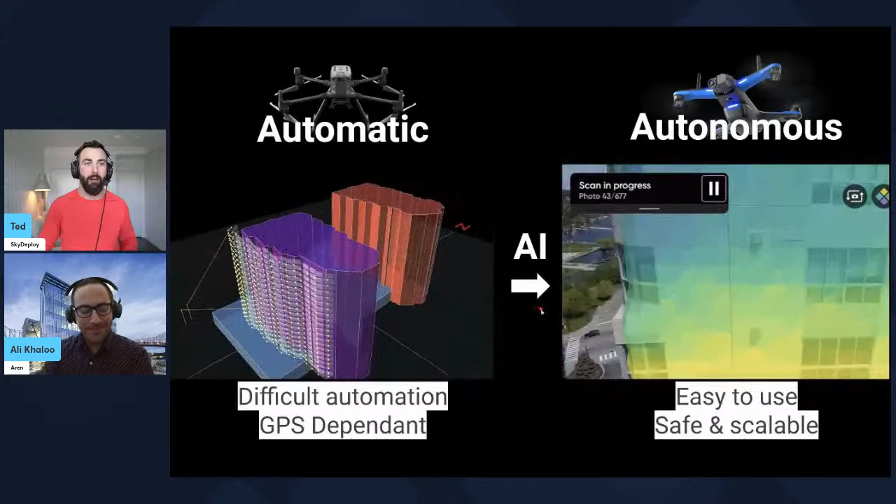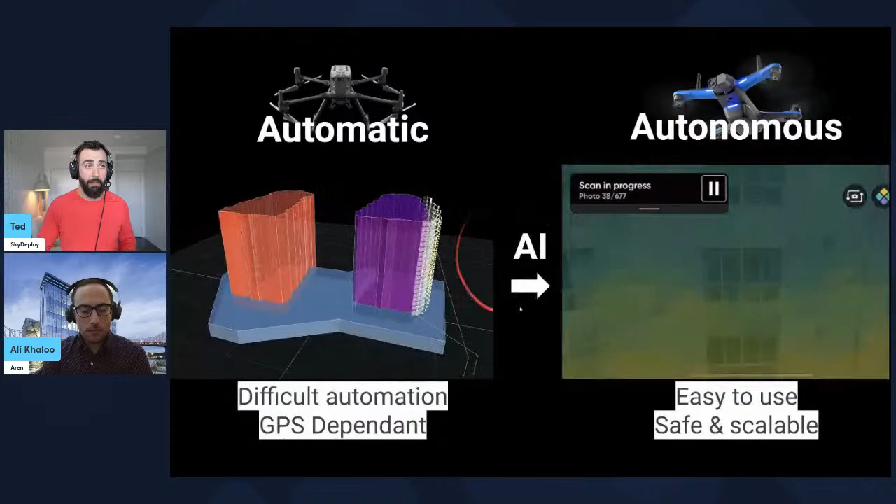This is my favorite component of the data collection part: the AI in the flying of the aircraft. Specifically, the example here is the Skydio S2 Plus with 3D Scan that I used for this facade inspection, and I planned it with an automatic drone in mind first. Then I tried 3D Scan when I got there, and it just worked, it was so easy, I could hand it to any one of my employees and they're off and running.

And finally, data analysis — that's what we're going to be talking about in depth today. Data analysis has been around forever, we're always analyzing some sort of data, but in the civil engineering world it gets pretty complex, and even with drones, that complexity remains.

So Ali, you shared with me the slides on the left. Can you walk me through what we're looking at?

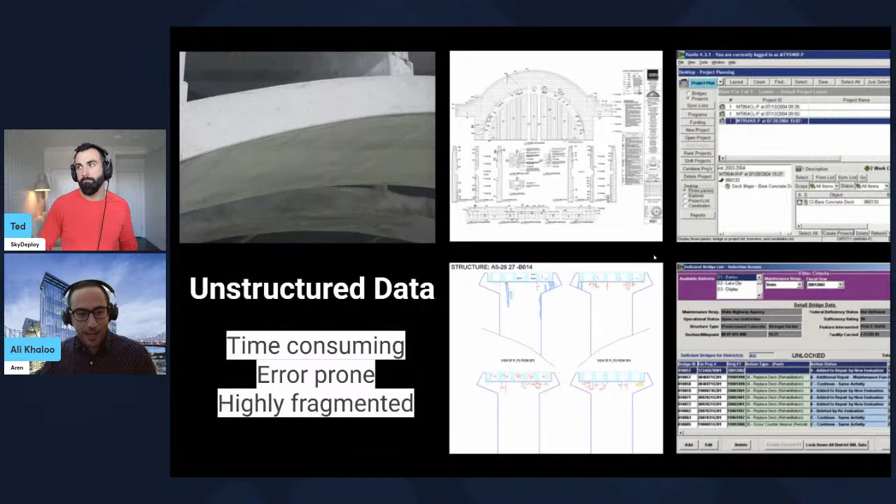Absolutely. So before jumping all in on AI and analyzing visual data, let's take a step back and understand what is the status quo. And as I mentioned before, I've done it myself, so I have first-hand experience on this. When you're looking at the way you're creating data from our assets and the whole condition assessment inspection, which later on you're going to use for decision making, that whole pipeline is very much precarious and outdated. When you look at the details, it really didn't change much since the 70s.

So what happens right now is you have very skilled engineers that you have to send out there, and they have to literally climb and walk miles and miles of infrastructure, let's say bridges, with nothing better than their naked eyes, looking for millimetric damages, such as cracks. Sometimes it's literally naked eyes. Sometimes it's hammer sounding they have to do to find hollow areas. Sometimes they have to use binoculars to look for different things.

And after doing all of that, which by its nature is going to be inconsistent and subjective, you have a newbie going out or a very experienced inspector, and you're going to get different results. That's known within the industry. After doing that, now you're coming back to your office and you have to put together a report.

So in the middle, what you're seeing are actual reports from a building facade on the top, and on the bottom from a bridge. In these cases, now you have to go through your field notes, go through the images, which like the ones you're seeing here, by nature are decontextualized. So you don't know exactly from where you took those images unless you're making clear notes.

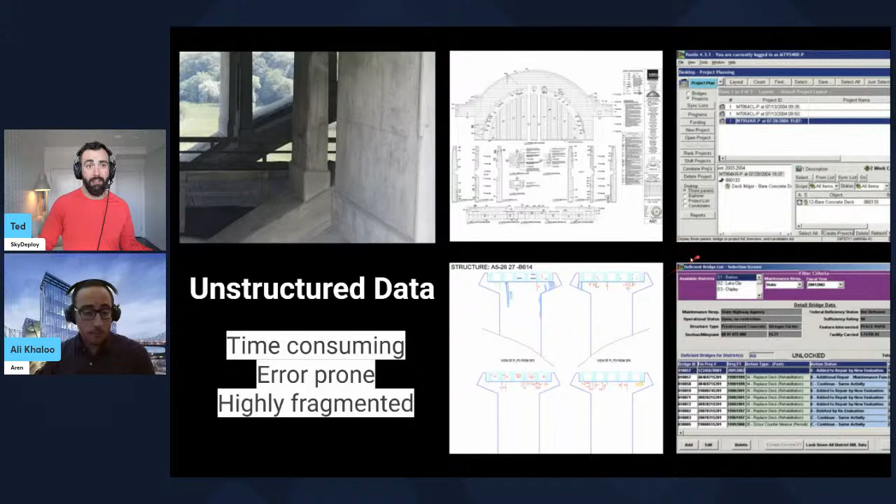Absolutely. So you're in the thick of it. You were the one doing some of this work, making these spreadsheets and these drawings. And I guess that's where the inception, the idea for AREN came from, right? And that's the problem you wanted to solve. So that's what AREN is about.

It's about ingesting various types of data and then using AI, computer vision, a whole mixture of technologies to really streamline that final process and make better decisions because everything is in one place, but it's also been boiled down to what matters, and efficient.

Absolutely, you have to keep in mind that we are capturing a lot of data from these assets and different sources. Sometimes it's something as simple as photos from a point and shoot camera or your cell phone. Maybe you get more sophisticated and add a drone to the data collection. Maybe you have lidar, maybe a 360-degree camera, maybe infrared.

So what we do at our company, and what our product does, is take that data from our clients, run its magic, and as an output you get a highly detailed visualization of the asset and its health through time, as well as preventive maintenance plans and capital allocation plans.

But when we're talking about the 3D models and the way that we are doing this change-in-time analysis, it's based on the information you're seeing on the right hand side. So basically we are creating 3D models, and all the analysis happens in 3D. We are detecting all the damages, quantifying those damages, providing the severity analysis of them, and all of that is based on the codes that we have in each country.

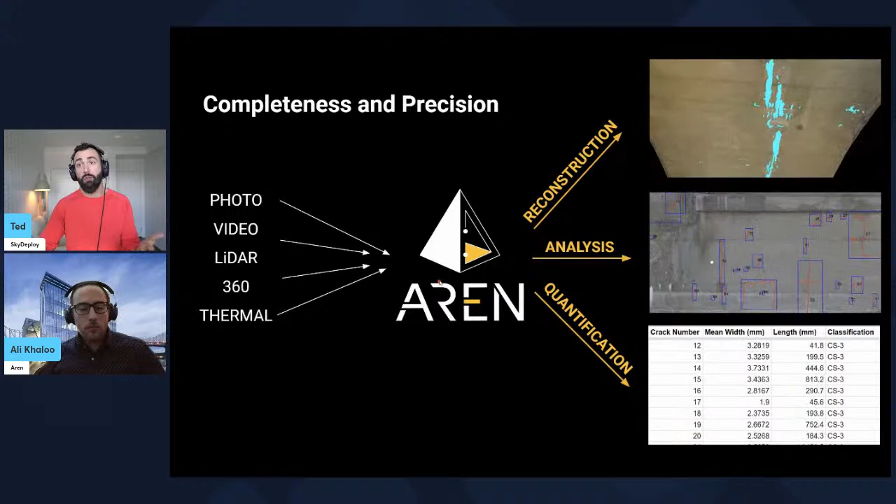But when those things come together, and as they are getting easier and more scalable to put together, you get the 3D reconstruction, the 3D model from photogrammetry built into your product. You don't have to do that elsewhere and bring it in. You get the analysis through the AI, so that speeds up an insane amount of time in terms of going through and looking for it.

That's 90% of the work, and then an engineer can validate it afterwards. And then you also get, my favorite part, the quantifiable data on a damage-by-damage, element-by-element level, and that's something that before I saw AREN, I hadn't seen done completely in an automated fashion. That got me really excited.

So we had a lot of questions with some posts I put up. We decided to do this webinar to get people into understanding what is required for this to work well, and then how it works, because AI has to be explainable for it to be really adoptable.

So, short answer, absolutely yes. You have to keep in mind that the whole goal of asset management—let's say you're an owner and you're going to have that asset for the next 50 or 100 years, these assets usually outlive us—what happens here is you want to minimize the life cycle cost, and at the same time improve the serviceability of that asset. So those are the top two things that you want to do.

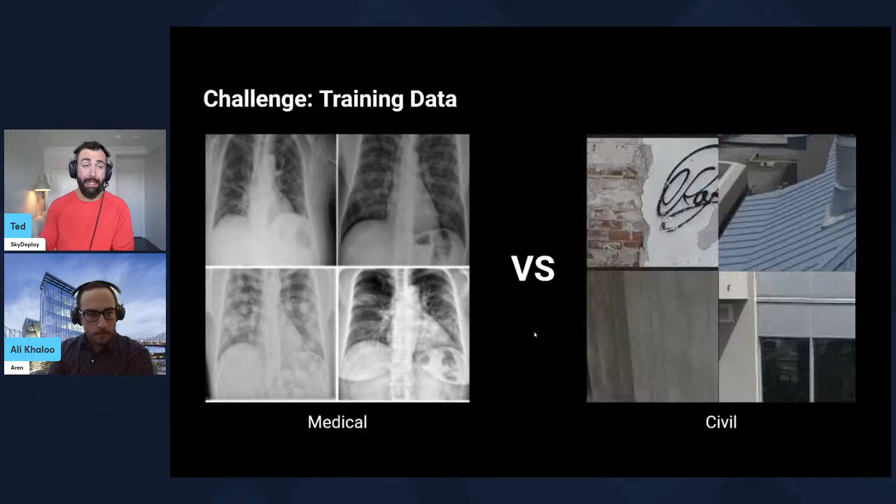Yeah, no, it's a big problem. And like you said, the data isn't collected with the intention of making it into 3D geospatial formats after, right? So no photogrammetry intended with the data collection, even if the data set exists. Yeah, so that's a big problem.

Now, once let's say you have a data set and you've trained it, what kind of scene understanding is there, and what do you need to apply in the case of engineering and civil assets? That's a very important thing. It's not just, hey, let's apply AI to this very particular problem. So let's start with how the computer sees things and identifies things, and how that evolved over time.

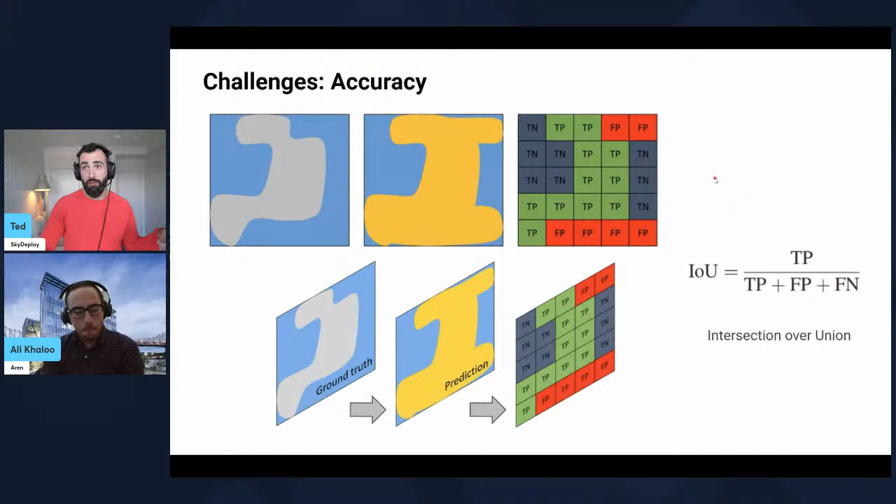And it's a real reputation burner if you get it wrong, right? You've got to be ready for game time when going out and doing this type of inspection, since the engineers are looking at it. There's no chance for mistakes, you really have to prepare and have great accuracy out of your models.

So another factor of difficulty, the way I understand this slide is the crack in this image takes up such a small percentage of the pixels, it's such a minute detail. To us humans it's obvious, but to a computer that only sees numbers and pixels, that can really throw it off as well. Is that what we're looking at here?

Absolutely, you're talking about challenges on why this is a tough cookie, a tough task to take. Basically what happens here is the computer is going to learn from the different features it's going to see in your data. So when you have the target region, let's say in this case cracks, that yellow, as a good example.

So when you have the pixels associated with the crack, defined as cracks, when that ratio is 1/1000 - one pixel for the crack and 1000 for everything else - when you have that, we call it an imbalanced data set. Your mathematical model, your deep learning neural network, whatever you want to call it, should account for that, because you're not seeing so many of the crack pixels, you're seeing actually a lot of background.

So what's going to happen if you don't account for that? Going back to the previous slide on accuracy, if you don't account for this kind of imbalanced nature of your data set, what you're going to have, as seen on the lower half of the slides, is false positives and false negatives. Especially the false positives, there's going to be a lot of that.

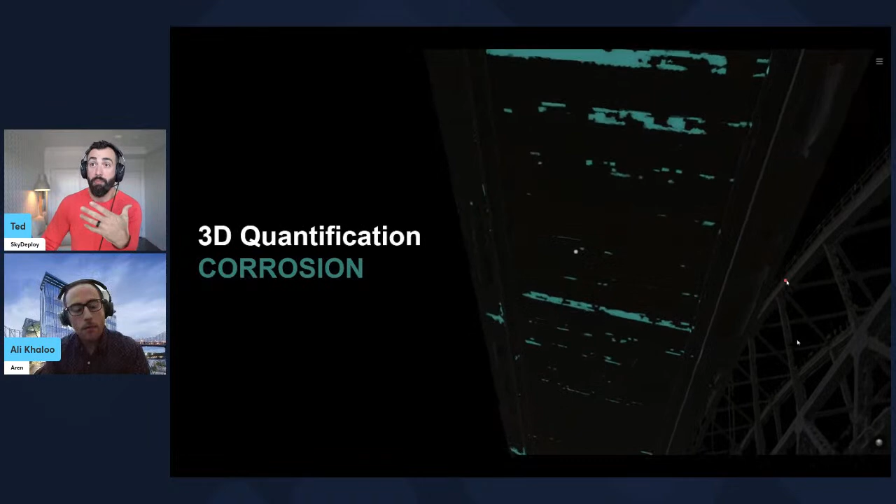Here's an example that I collected with the Skydio 2. It's by far the best drone to collect bridge data from, in my opinion. And I never collected it with this use case in mind. I was just there doing a video inspection, which is typically how we've done bridge inspections. We had some extra time because we were done so fast, so we collected this data so I could test out some photogrammetry, because I love photogrammetry.

But one of the things that you detected right off the bat, it's concrete, so you checked for efflorescence, cracks, and spalls. And I was really impressed. Anyone that sees this immediately understands what they're looking at, and they immediately understand where they're looking at, right? There's no ambiguity there. It's contextualized.

So that allows engineers and experts to really identify issues from a very high level, but also very specific as well, element to element. Something may not be so important if it's isolated, but if there are other things around it going wrong, then that's a big red flag, and that's again why you need the expert to look just at it.

To emphasize why it's important that you have these labeled 3D models - all those damages, they're in different formats. You have the RGB model, and you have the hotspots for that efflorescence here, or the one before, which was everything dark, where only the corrosion was available in 3D to see. So there's two things which is very important.

Number one is, I've had many conversations with engineers who have seen drones, they've seen 3D models, but basically the impression was: it's cool, it's nice, it's a nice 3D representation of my asset. Yes, of course I can do some virtual inspection type of work on it, I can make some dimensions. That's all good, that's all benefit. But again, if I have to look at the 3D model, and now I have to spend hours and hours on my computer to render the model and look for different damages and then annotate them manually, it's sort of like you're almost back to the same place of subjectiveness, inconsistency, and on top of that, having this tedious task to do.

That's why we are doing all the modeling in house. And then, through our platform, we can very easily render these models on different devices with different compute powers.

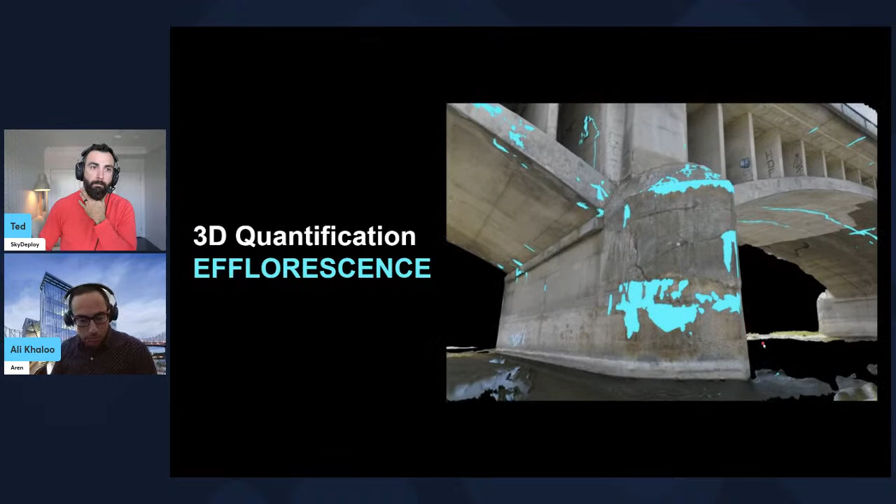That brings us to the second point I wanted to make: quantification. By having everything in 3D, now you can quantify and understand the size of different damages, the depth of the spallings, and all that kind of stuff.

And as you mentioned, we do all of that per material. So right now, in terms of offering to our clients, we are working with clients on concrete assets, on steel, asphalt, masonry, stone, limestone, for example, and terracotta.

It's important to mention why we did it this way, why material based, because now we have this huge catalog of AI models for concrete, and we can apply that to a bridge like the one we're seeing on the screen, or the same model to cooling towers, industrial chimneys, dams, levees, you name it. Same thing with steel, same thing with asphalt. So it helps us get to different verticals without customizing the technology or tweaking different pieces of it.

So we had a question: is the solution already marketed in France or Europe? I haven't seen it yet. Well, it doesn't matter where you are, because as long as you're giving it good data, then it works. So it's completely agnostic of the input source and how you collected that, as long as you did a good job.

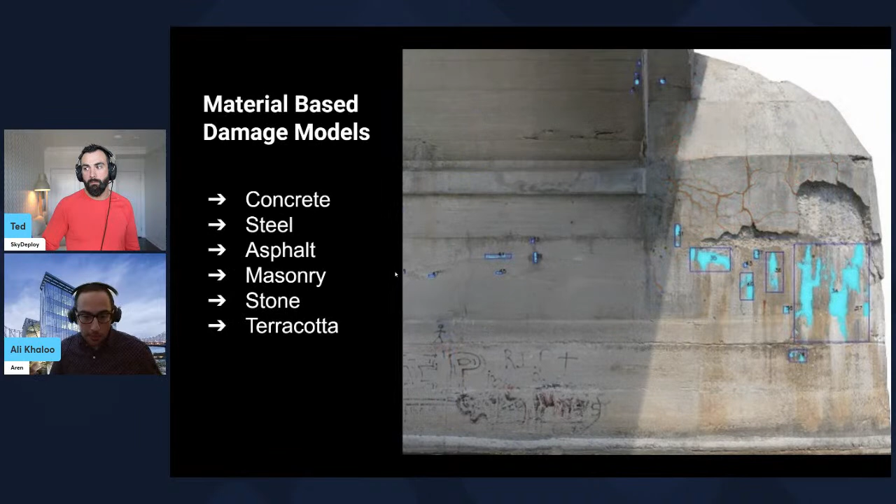At the end of the day, we're a SaaS product. So right now, the way we talk about ourselves is: if you have data coming from Paris or coming from San Francisco, it doesn't matter to us, as long as it's good data. Regarding whether we're working in Europe, yes, we're working in the US, in Canada, in Europe, in different countries, all the way to Japan. So we are available to get different jobs in different parts of the world.

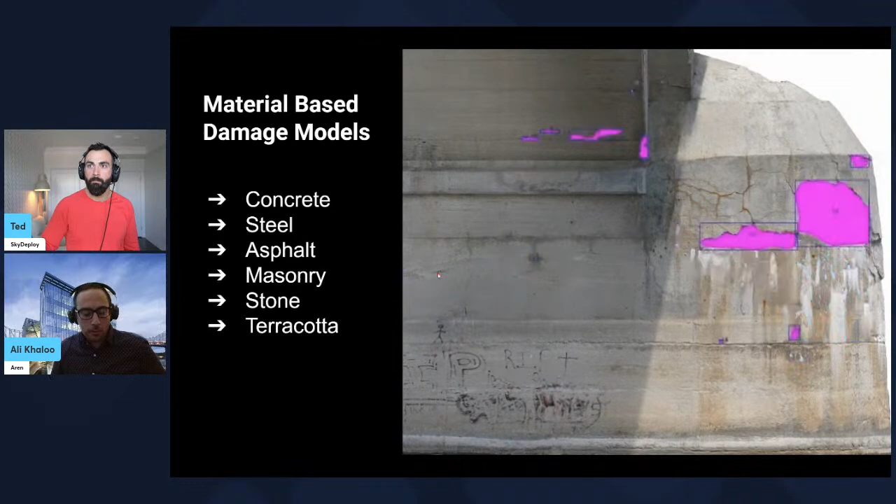And you're seeing all kinds of data. So one type of data I recently had a chance to run through AREN—I'll take you guys through a little case study of how we did the data collection, because in my opinion that's where it all starts. At the end of this, I'll also share a link that Ali provided, and you guys can open the data set yourself and explore it in 3D.

This just shows you don't need a device or a fancy computer to open this. This is a 2 kilometer runway, very high resolution. You can open it on your phone with a QR code, so check out this airport. We have an intersecting runway, and we're doing an asphalt condition assessment.

The interesting thing was that drones at airports are complicated. Everybody knows that, but it's doable. We were really out there to discover: how complicated is it? Is it scalable? And what are the things people should look out for?

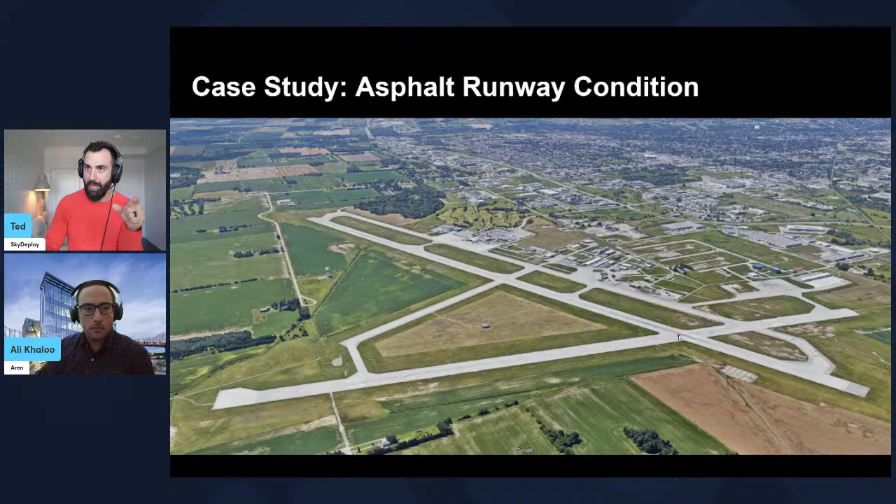This was done through an academic institution, and we had a small window of opportunity where they were repaving the intersection. This runway was completely repaved at that point, but they left the intersection for last. So the airport was open—there were aircraft, jets, 737s going in and out throughout the day. It was a towered, international airport with flights to all over North America, and we had to keep all of that in mind.

We couldn't shut down the airport for this, because there wouldn't be any point—we could just do it the traditional way, literally driving down the runway and looking out the windshield, what's called a windshield survey. That type of survey is completely unquantified, just random samples. The engineer, or in most cases the airport operations people, are just giving themselves a qualitative look at the site and sampling different sections.

So our thesis was: let's see how quickly we can do this. Speed is super important, and we can't shut down the airport—of course, we are going to be able to shut down that surface.

That runway is not going to be taking takeoffs and landings, but you have to do that anyway if you're driving on it with a car, or if you're walking on it. Any human on that airport surface means it has to be NOTAM'd and closed, at almost any international or larger airport with a tower.

A few interesting things we encountered: at an intersecting runway, we had planes landing and taking off right above us, so we had to change altitude in some areas. At the intersecting area we had to fly lower to the ground, and we kept the same altitude in other sections. We had a tower, which was helpful, but they have a lot to think about.

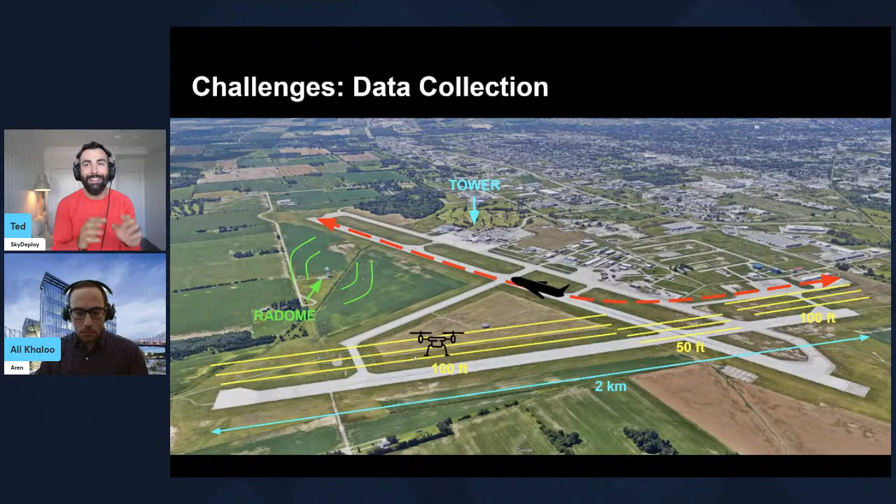Additionally, we found some interesting interference from the radome. This is a very powerful radar, this big white sphere, and it's emitting a lot of energy. You can't even be too close to it for long periods of time. When we were flying, we noticed the signal strength between the drone and us was degraded quite a bit. So for people thinking about exploring this, keep in mind all of these things that we learned, and hopefully you're prepared for them too.

We had a bit of a balancing act to do. We needed high resolution, high accuracy data, but we had a large area and little time to do it. We estimated the data collection needed to be wrapped up within about 2 hours, end to end, because we didn't want conditions to change. Weather is highly variable, and then also the traffic—we didn't want to disturb any airport traffic or cause any more problems, because they're never going to let us do this again.

High resolution means low GSD. We were using a 45 megapixel camera, a P1 on an M300. That's very accessible, a workhorse in the industry. It's not super expensive, it's affordable, and most people that do operations already have it. 45 megapixels is not that many.

We had to fly low to support this mission, which means low GSD, low ground sampling distance. We were able to achieve a ground sampling distance of about 0.3 millimeters. It turns out that the tower, after we did this flight, actually preferred us to fly low. When we were flying at 100 feet, that was low for us, but they said, could you go lower next time?

We could, and the reason was that at 100 feet, they could see us, and this drone was moving back and forth, and it was kind of confusing. It was something they didn't want to have in their sight and think about because they're so busy. So that was the first thing we learned—low is good, so that's promising.

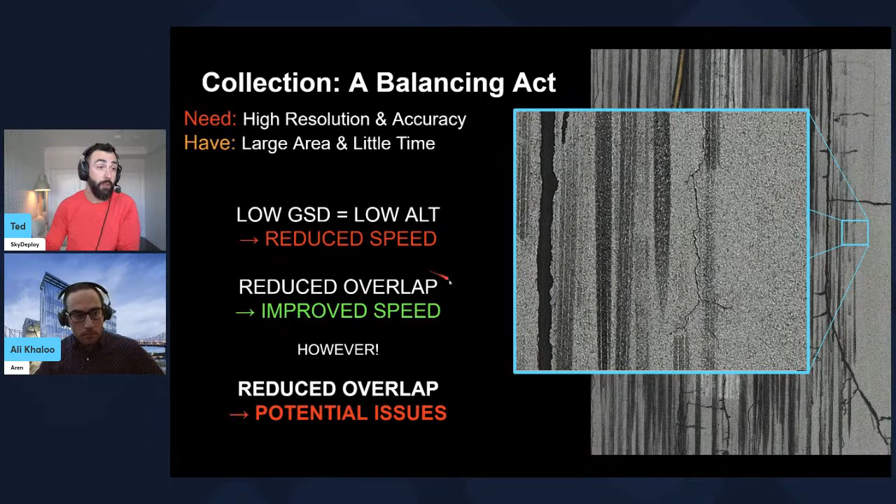But when we went back and processed it—and this was actually before I had even met you—I tried processing this on a few different photogrammetry engines, which everybody knows I love to do, and I had some interesting problems. I had GCPs, 36 of them, and we set them up as you're supposed to set them up when you're doing corridor mapping.

We had PPK, so we fixed the metadata in the image with PPK tags. The position of the drone when it was taking that picture was very accurate. And all of this together in any other situation would have meant it's going to be a perfect, highly accurate map the first time you try it. Well, this is what I got the first time I tried it.

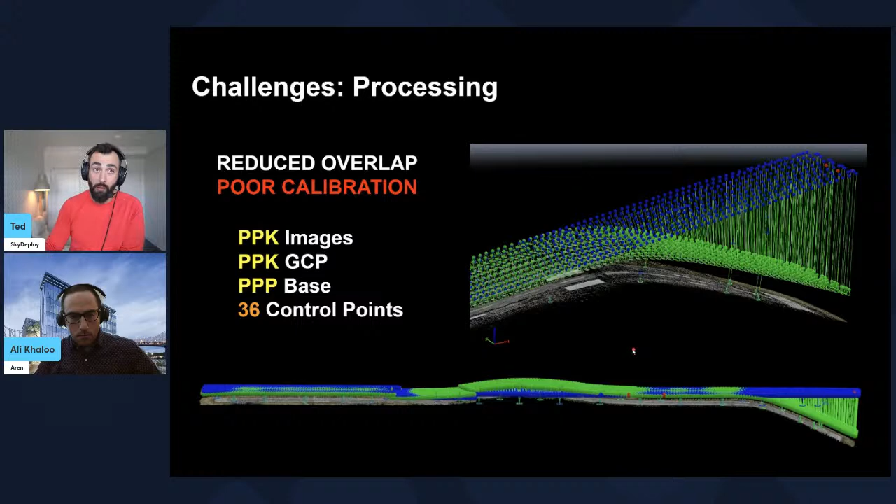People familiar with photogrammetry will recognize this is Pix4D Mapper, one of my absolute favorite applications. I love it, but it didn't do so well with this. I discovered after a lot of tinkering that this was related to the camera calibration. Because we had overlap less than typical and were flying close to the ground, and the runway had a lot of features, but the features were very similar since it's asphalt here, asphalt there, the internal camera calibration did not optimize those values as it should.

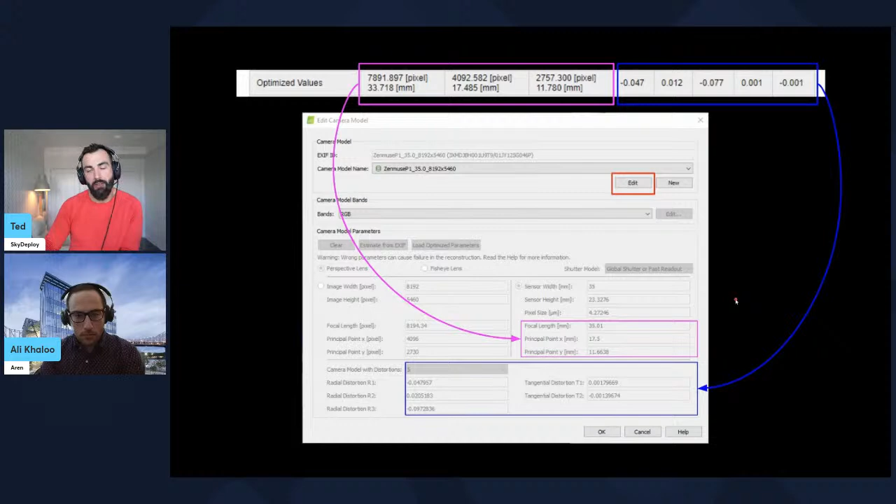So I eventually fixed this problem. I got to the bottom of it. I made a post on LinkedIn about it as well, and I'll probably do a little bit more. But it was time consuming, so processing took a long time, about 24 hours, and I'm doing it on a fairly beefy computer.

And I got my resolution. I was able to figure out exactly what that resolution is because of those ground controls. And overall, the model was within 1.5 centimeters in RMSE error. So the accuracy, even across the z-axis, the up and down, was within that 1.5 range.

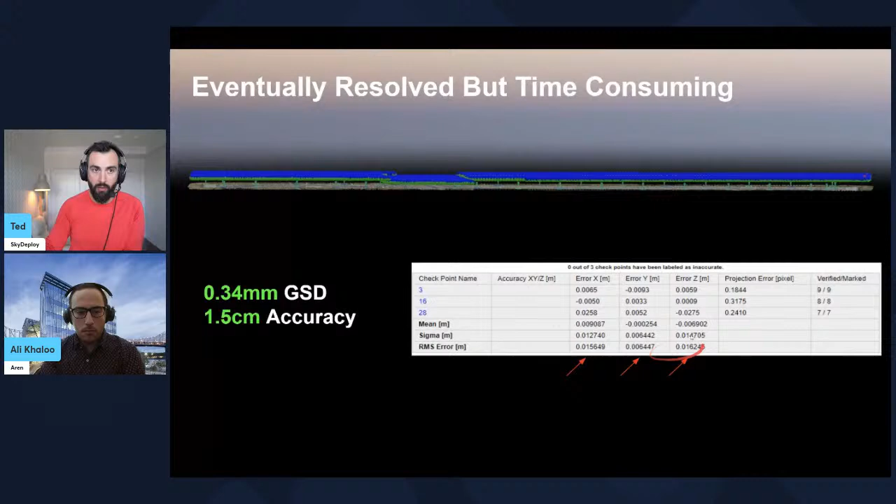That brings up the question: I did GCPs, I did PPK. Did it matter? I ran this test two times, once with just PPK images and once with GCPs and PPK tagged images. And I found that when I processed it through AREN, the difference in length between control point A and control point B that were farthest apart horizontally was just 0.019%, which was 0.35 meters, or 35 centimeters, across almost 2 kilometers of distance.

That blew me away. Doing control points in this kind of situation basically doubles or triples your time. We had to get out there at like 5 a.m. and start collecting these images. And it turns out you don't need to do that. So this is very efficient, very practical, and I think airports should be doing this.

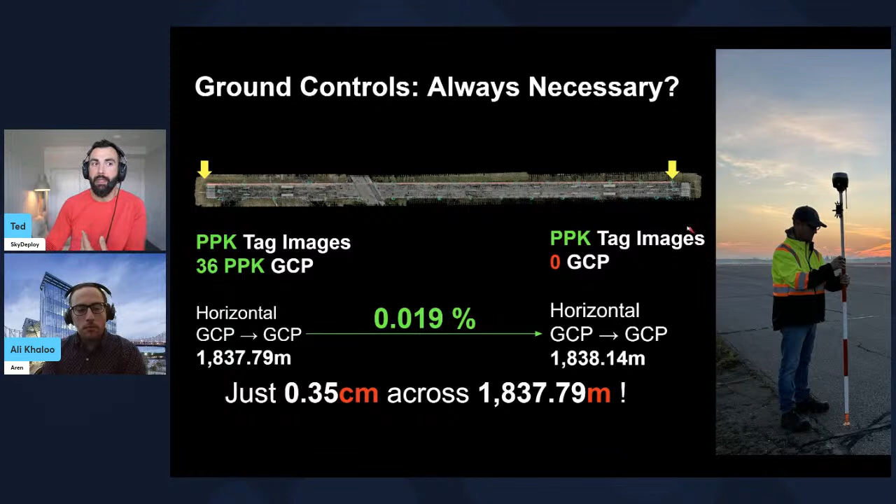The amount of data that we collected was incredible. Shout out to the other photogrammetry engines that also had no issues, but they didn't have anything for the analysis. So I mean, I can't go and label 2 kilometers worth of cracks.

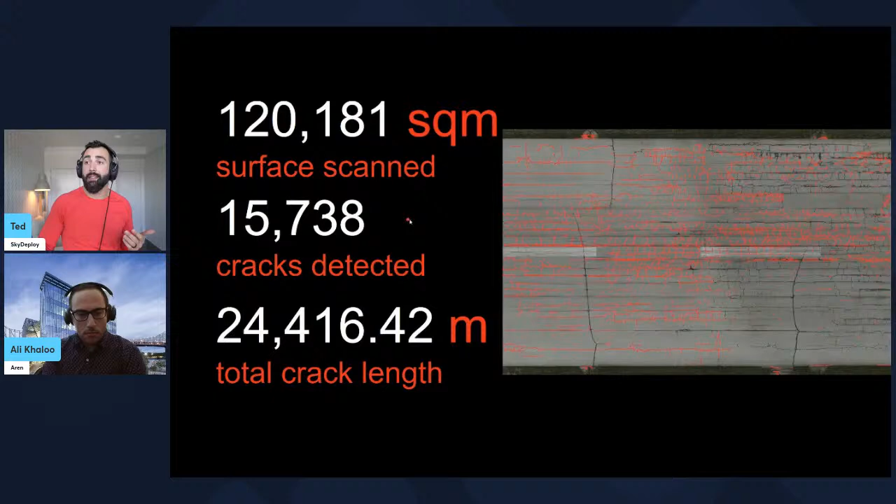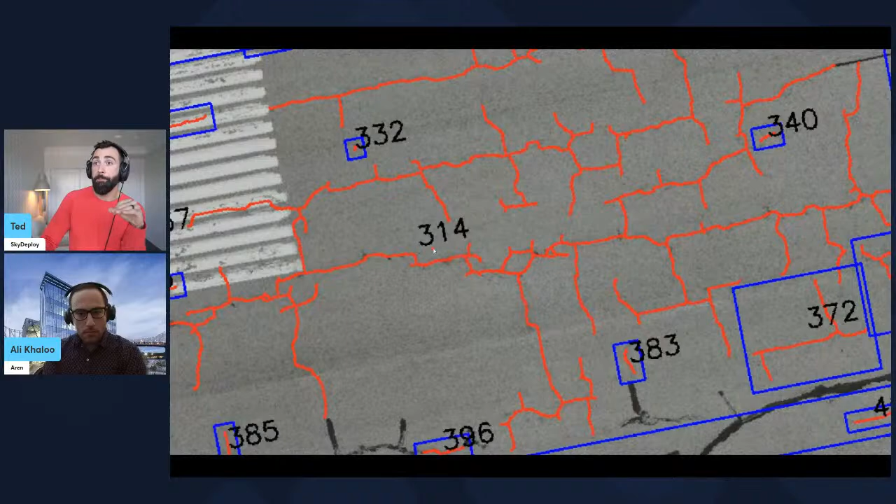And when we ran it through AREN, we had almost 16,000 cracks detected. If you stretch those cracks end to end, every little branch, every little corner, it adds up to about 24 kilometers of cracks. And if you look at it, very, very few false positives—I was barely able to find even one across the entire data set—and very few false negatives given the data that I was able to provide it.

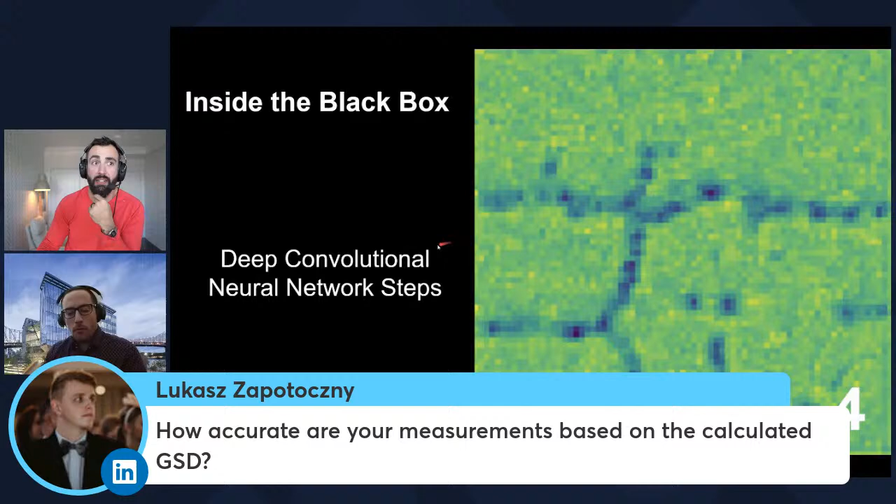So now you have this very clean, semantically labeled image. Lukasz here asks, how accurate are your measurements based on the calculated GSD? So that is what kind of sets your smallest unit of measurement, is your GSD. We collected at 3 millimeters, so I know that each pixel on that image, even after it's been processed by the AI, represents 3 millimeters on the ground. So it really depends, is my answer.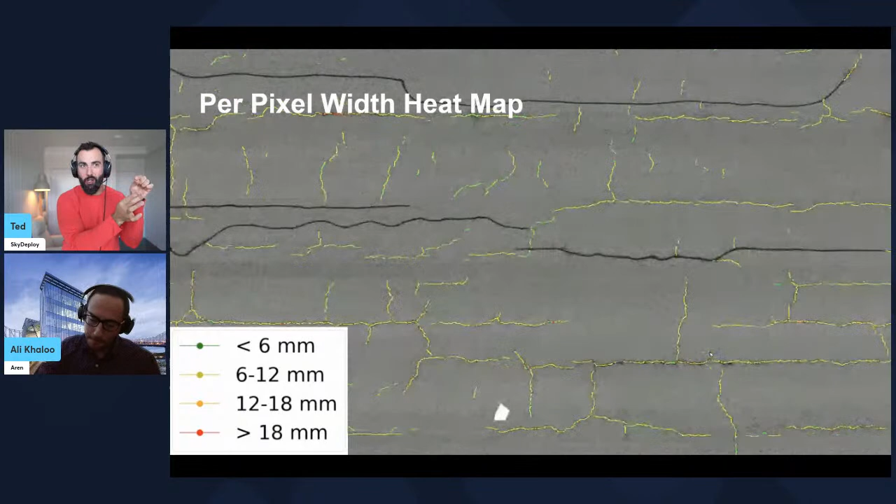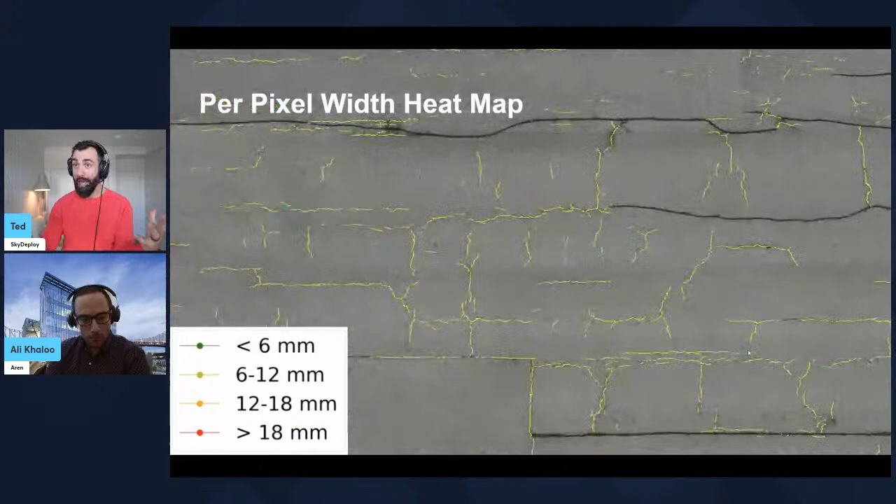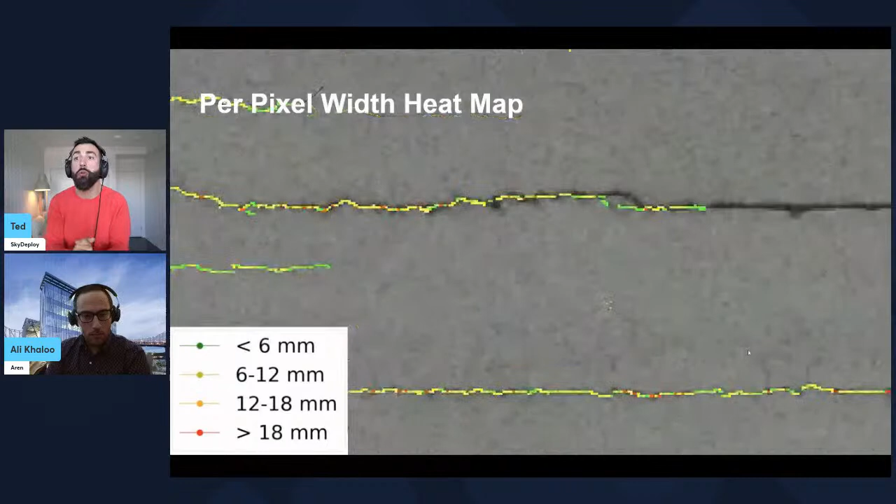For 15.5 kilometers worth of cracks - no, that's never going to happen, right? So if anything, this is orders of magnitude more data than we're used to, but it's data that matters because, as any engineer will tell you, it's the crack width that they care about, not so much the crack length. And seeing the relationship between the crack length, the crack pattern - longitudinal, transverse, alligator cracking - what's happening in terms of how they're arranged gives you a lot of insight about what the potential issue would be underneath the ground. So then you can maybe go and ground truth it, do a GPR, a ground penetrating radar. You have a starting point because you have all of the contextual information and quantity information together.

So this is available for the audience to check out. AREN uses the Nira viewer, which everyone knows I'm also a huge fan of. But the big X factor there is that all you need to open it is a device that can play video, and you'll be able to open a 3D model. So on your screen is a QR code. If you pull out your camera app and look at it with the camera, you don't even have to take a picture - you can open up the link and take a look at the model itself. So dive into that, and if anybody has any questions, I'll go through some of the comments that were made, and then Ali, you can answer them.

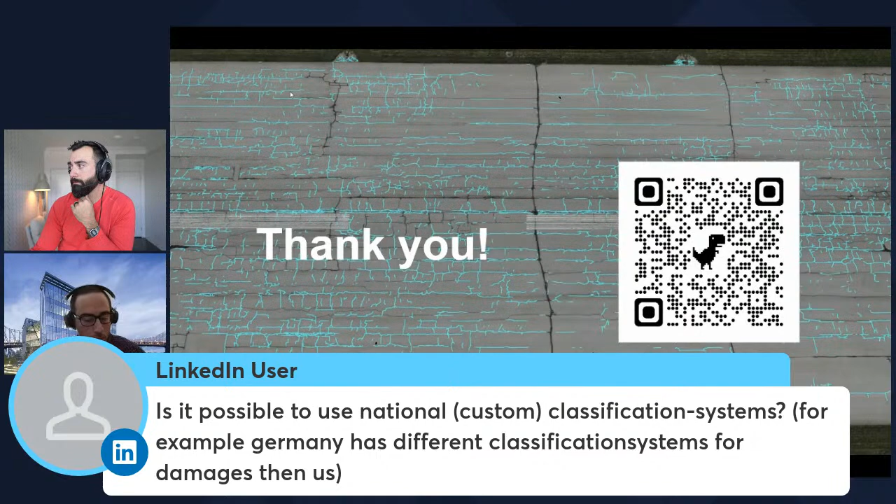Because we're working in different countries, we're very much used to this, so we can easily adapt to whatever standard you have in that particular country, or even for that particular asset. Sometimes the asset owner wants even more granular information than what the standards of the country require. It's just pixels on a screen, right?

And that leads to the next question: can we rely on ortho photos? I'm pretty sure some of the files that you delivered to me included ortho photos in that. So an ortho photo is a 3D model basically flattened from a perspective, so you can do both, right? Is there anything I'm missing there? No, you can do both.

In fact, when you're looking at the deliverables, we provide both of them. In the case of a flat surface like this one, it's going to be just one orthomosaic covering the 2 kilometers. In terms of the bridges, it's going to be each face of the elements providing that orthomosaic, and we're reporting based on that. The reason we do that is it's easy copy-paste into whatever PDF format the engineers have to report to the owner, so we're just providing all of that information to them.

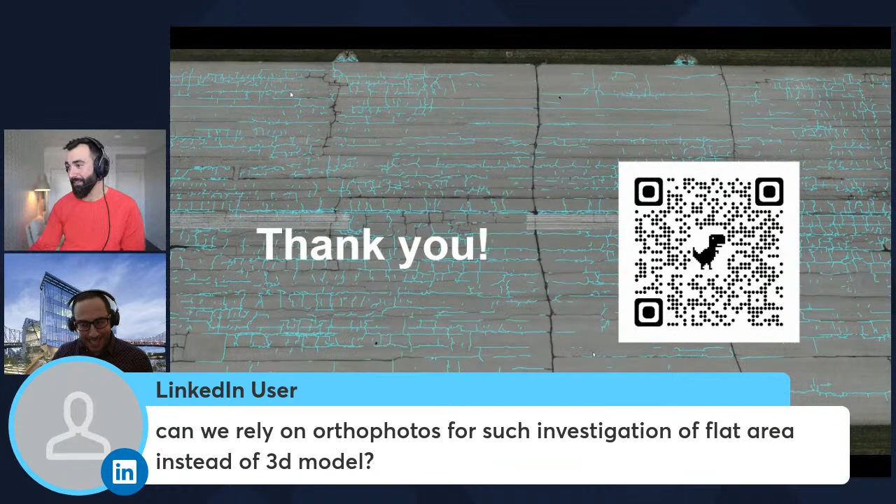Yeah, and PDF is still king, right? I always tell people in the 3D world that we're competing with 3D data versus PDFs at the end of the day. Little by little it will change.

Next question: is it possible to detect crack depth? I can answer that right off the bat - I tried doing this. If the crack is wide enough and the width of the crack is wider than the pixels, and in some cases maybe even just slightly, you can. It's GIS data, right? You pull it into something like QGIS, use the profile tool and draw a line across it, and you'll see the profile. I was actually able to match visual cracks in the ortho to a significant dip in the Z height in the profile view.

So it really just depends on your data. If crack depth is super important to you, then make sure you get data with the resolution that allows you to do that. Am I wrong there? Have you seen this from your clients? We're giving the same exact answer - if that's what you're going for, you have to pick the right camera at the right distance with the right focal length to get to a GSD number that provides that depth for you. That's the only way to do it.

And with all of this, you have to remember - it's intuitive, but if you're looking at a 0.05 millimeter crack, I'm talking about within this particular case, you cannot expect to achieve that with a GoPro camera standing like 100 meters away. So you have to do better than that.

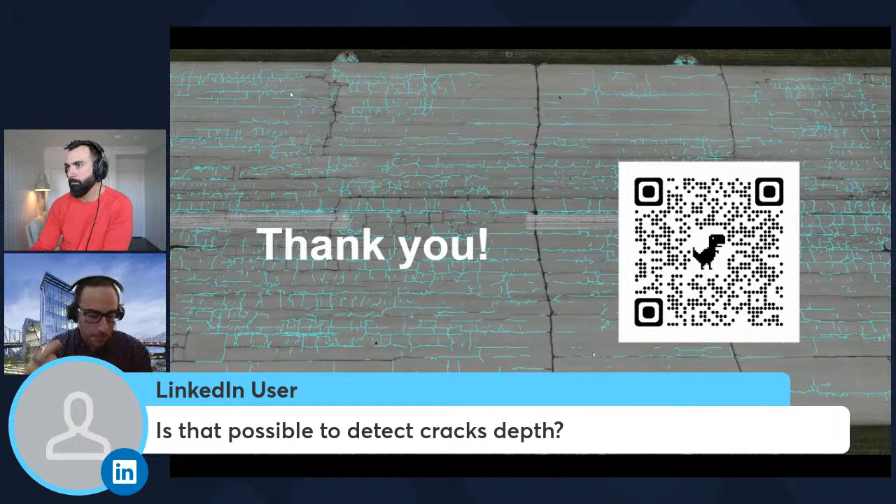But yes, if the GSD complies with what you're looking for and the width is wide enough to see the depth, then we can actually detect it and quantify that.

Yes, absolutely. We have done that on several projects. For example, inside of the box girders, they had a laser scanner and images capturing the walls, and that's how we put together a fully detailed 3D model of the box girder, just as an example. But yes, the short answer is yes, we are able to do that.

Benjamin says a runway is bathed in ambient light. He's absolutely right. What constraints act on capturing useful data for poorly lit surfaces, dark underbelly of bridges, dynamic range issues, shooting into the sun?

Oh boy, I could talk for a day straight on this topic. You have to collect the data as it is. The camera matters, the exposure settings matter, the file type matters - JPEG versus RAW. I'll talk your ear off about why RAW is so important for me. If you can see it in the picture and extract it from those pixels because the sensor was able to trap it, then you can get it into a pipeline like AREN and do these detections.

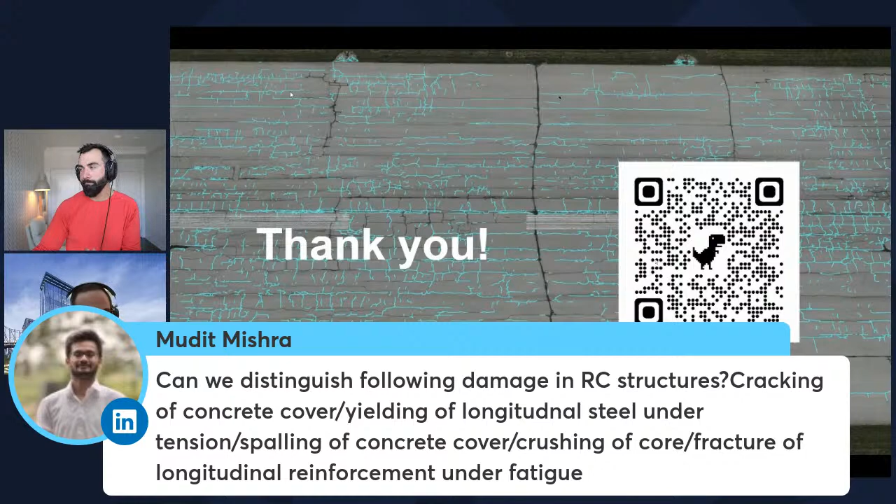And on top of that, that's the part I always like to emphasize: we're augmenting the process. You have the human in the loop, let's say our client, the civil engineer. We give all of this data to them, and they start to see, okay, now you have this kind of cracking here and that kind of cracking there, and these are the sizes of them, and maybe what went wrong there, and maybe they have to go out again and do another test, some NDE methods. This is all about making sure the engineers have the right data to make decisions. It's not about replacing the engineers with a machine, none of that is going to happen. It's all about helping them do the job easier, faster, and more thorough.

Yeah, that's it. And engineers have a lot of work ahead of them. They've always had that, it's a tough job. It's hard to become an engineer. They have better things to do, they shouldn't be poring over PDFs and drawing lines where the cracks are. So let's free them up, let's give them some tools, and let's get our infrastructure and our assets in a better state for the long term through that.